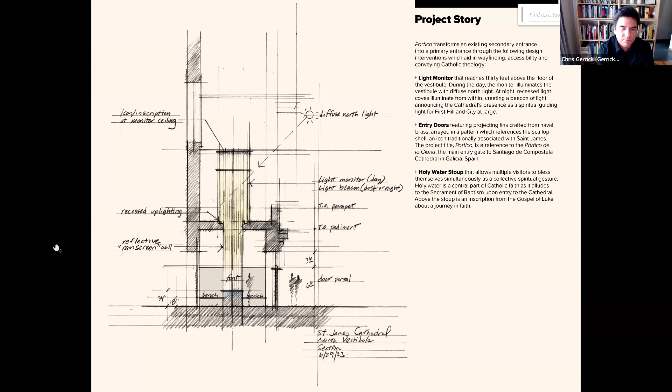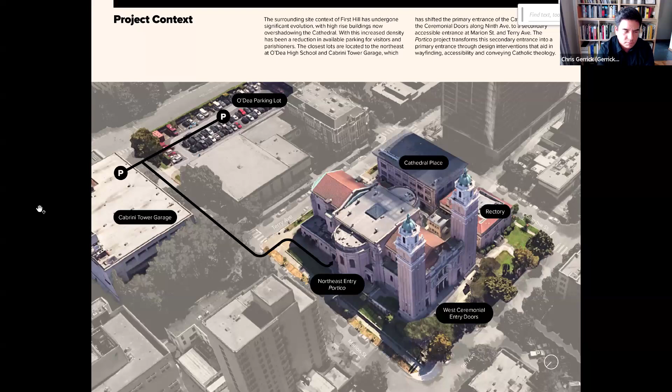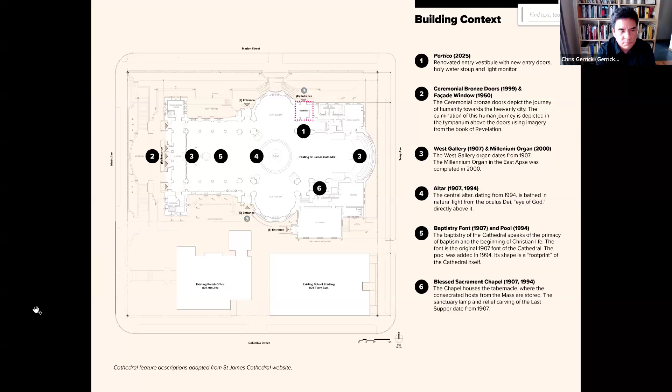A little bit of theological context. St. James, the patron saint of the cathedral. Many of you are familiar with the Camino de Santiago, which is the way of the saint leading towards the Cathedral of Santiago de Compostela, the burial site and shrine of St. James. A few aspects of St. James iconography-wise are the scallop shell. If anybody goes on a pilgrimage, oftentimes you'll see pilgrims carrying these scallop shells, and they're even used as wayfinding signs to help pilgrims find their way to the pilgrimage sites.

Additionally, as a pilgrim, the walking staff, in this case the gourd, is often associated with St. James as this path, this journey that you're taking, a spiritual journey.

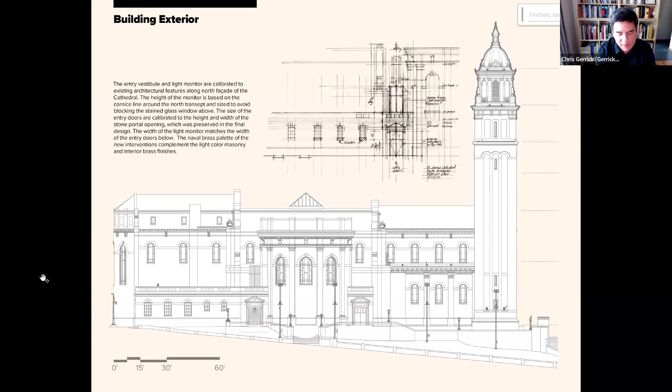Here's an elevation showing the scale of the light monitor in the entry doors. The light monitor is calibrated to the existing proportions, the string course of masonry around the building, around the transept. We took care to avoid blocking any existing stained glass windows. The cathedral is a landmark structure in Seattle, so we had to make presentation, but it was unanimously approved by the city in terms as a sensitive intervention in the existing context.

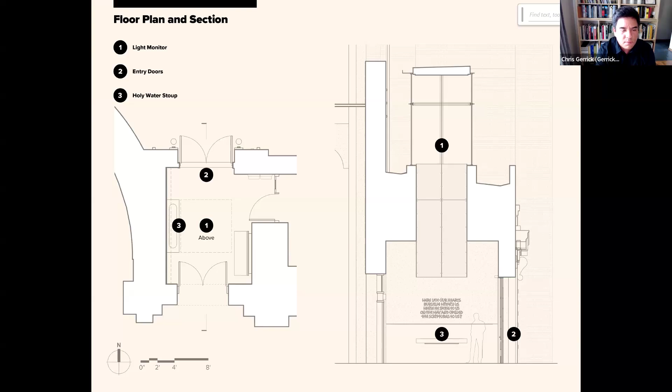At night, the light monitor glows. So during the day, you have this duality of the daylight coming in and then night acting as a light beacon. We took care also in terms of the detailing of the light monitor, so the structural columns were custom WT shapes, also in the form of a cross.

The iconography of the cross, very important to Catholic faith, shows up both in the elevation of the mullions on the light monitor, but then also the detail of the structure. That particular shape was also contributing to the lateral capacity of the light monitor. So we were able to avoid having solid walls and diagonal bracing, given how tall the structure was. All those themes come together in both the iconography, the architectural, and structural design.

Also, one of the key aspects of historic preservation guidelines is reversibility. The design of the light monitor is situated on top of a tube steel frame that is anchored into some glulam beams along the perimeter. So in the future, if it ever needed to be removed, you could theoretically remove the light monitor. But this process allowed us to prefabricate the light monitor.

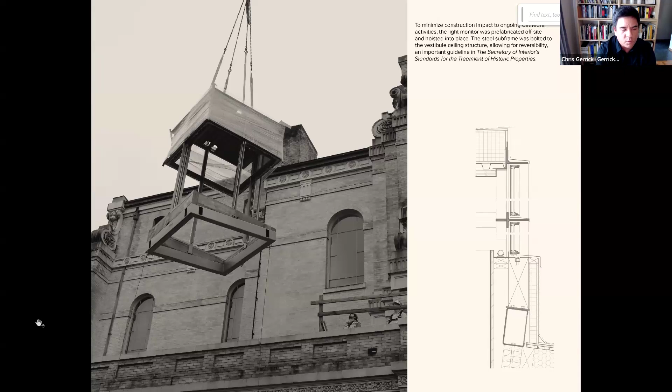The character of the light monitor changes over the course of the day. Even when it's not lit, you get a reflected light off the naval brass, which is used to pull in more of a warm light during the day. In the evening, all the concealed LEDs in the light cove above allow it to glow. So there's a sense of mystery and wonder where the light is coming from at all times.

The entry doors, the pattern of these brass fins on the entry doors allude to the scallop shell. In this view, you can see them radiating from above, and on the interior, they're radiating from below. To some people, it may evoke the scallop shells. To others, it may allude to rays of light from above. I know when Palm Sunday was celebrated there, some folks thought it looked like palm fronds. So there's a type of abstract symbolism to the way people bring their own reading into the design. The angled handlebars that handle the door handles allude to the walking staff crafted out of wood, also associated with St. James.

A view from the interior looking back towards the doors, the light monitor pulling in the light from above, the floating holy water stoup. The inscription on the wall is done by Robbie Schneider, a fantastic artist that we collaborated with from Scotland.

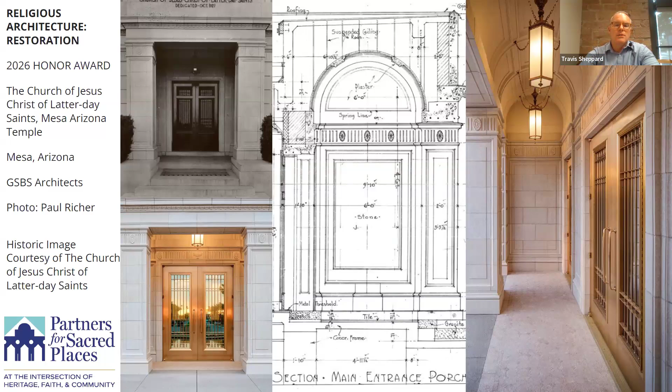A lot of the things that were lost in the remodels were proportion. Everything that we did, we had studied and meticulously documented the proportions of openings, materials, and details, and reconstructed the new with those proportions.

In the final design, we restored the pathways, gardens, reflecting pools, and the formal axes to strengthen the connection between the building and its surroundings. We restored a lot of the fruit trees on the site that can also be picked by anyone today.

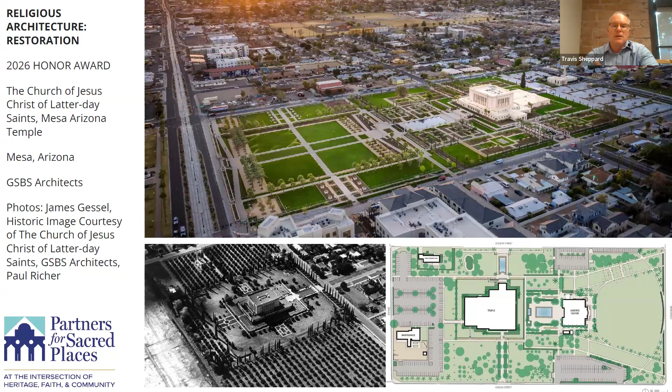A big part of the project, like I mentioned before, was sustainability. We created an underground cistern that captures local Salt River water for irrigation, which supported the restored landscape while promoting responsible water stewardship in a desert. The structural seismic upgrades increased the temple's resilience, and new mechanical, electrical, and water systems improved efficiency and reliability. On the interior of the temple, all of the lighting was replaced and upgraded throughout, on the interior and exterior, with highly efficient lighting sources.

Ultimately, the project demonstrates that preservation and innovation are not competing goals. By carefully combining historical research with modern engineering and sustainable design, this renovation honors the temple's past while ensuring it remains resilient, beautiful, and ready to serve for future generations. Then moving to the inside, that same level of care continued inside the building, which Stephanie will talk about.

Similar to the exterior, the interior restoration began by identifying the temple's original character-defining features and understanding what made those spaces unique. From there, we looked for opportunities to restore those features that had been lost, and importantly, to carry the same architectural language into the 1970s addition, which had originally been designed without many of those historic details. The goal was to create a cohesive experience throughout the temple while reorganizing the addition to improve circulation, functionality, and the experience for the patrons.

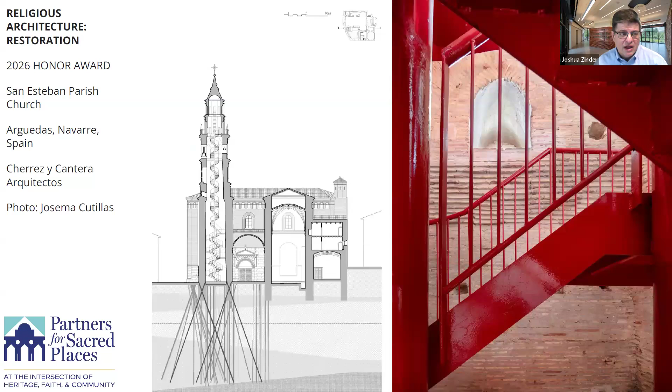The restoration process revealed to the architects how the root causes of failure were never properly addressed. Starting with underground studies, the architects provided diagnostics and a restoration strategy that defined long-term observation of the building over a 10-year period, including monitoring of movements, crack geometry, and their evolution, making it possible to identify the underlying causes of the damage. A targeted sequence of interventions addressed the foundations, walls, and rib vaults. The removal of unnecessary additions also restored the original natural light to the interior and recovered the south entrance and its square.

The jury observed: the entirety of this project was impressive, from the in-depth structural research that grounded the restoration plan to the integration of advanced engineering with traditional construction. Above all, what strikes us as the most beautiful is how restoring the original south portal also restored the relationship of the parish church to its plaza, spatially reestablishing an inspiring connection between ecclesiastical and civic forms of community.

Xavier Cherrez from Cherrez y Cantera Arquitectos is here to speak about the project.

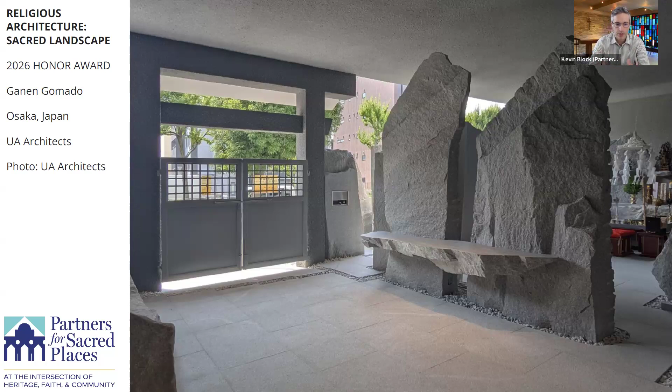Fire burns at the center as meditation rather than spectacle. Chanting, ritual instruments, and silence resonate against the stone surfaces, creating a soundscape that moves between intensity and calm.

The stone paving and gravel underfoot trace Osaka's ancient shoreline, recalling when sea and land once met here. This gesture connects visitors to deeper geological memory, reminding them that the present city exists within a far longer timeline.

Ganen Gomado is not an object to observe, but a place to enter, where nature, ritual, and urban life quietly coexist. The awards jury noted: in an overlooked and unprogrammed space beneath rows of mid-century pilotis, the applicants created a sacred Buddhist oasis in the midst of Osaka that nevertheless remains open to the noises, smells, and bustle of life swirling around it. The use of stone for the altar, light stand, dedication wall, and partitions, and the material references to fire and water, is particularly resonant.

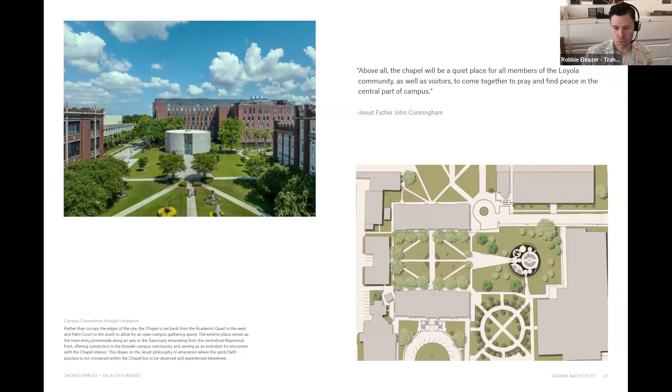So the simplicity of the partie, which you can see, invites people in both from the campus quad, the historic quad at the center left to right, but also from the palm court. And you can see how the interior geometries nest together and receive the campus into the plan. This is an acknowledgement that the quad was incomplete for years, and students began to move through this green space to get to classes as if a building wasn't there. So when we inserted the new chapel, we wanted to maintain that kind of spirit and not make the chapel a dominant force on the quad, but complete that part of the campus while still allowing for the free movement on all sides. Next slide.

The concept for the project arose by looking back at the namesake of the chapel, St. Ignatius, who created the Jesuit philosophical tradition. For those who don't know, Ignatius was injured in battle and recovered in Manresa in a cave, and during his recovery he received the divine inspiration for the spiritual exercises that would become the foundation of the Ignatian tradition.

We were conceiving of this project in the middle of the COVID-19 lockdown, with everyone working from home. We were really resonating with St. Ignatius in a cave, and thinking about the future emergence from the cave and what we might do.

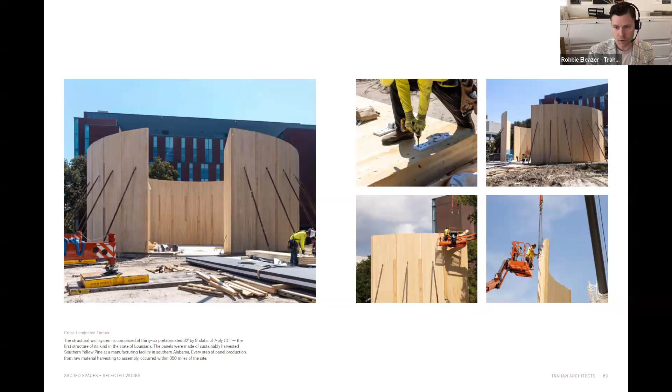32-foot tall, 8-foot wide planks of CLT tessellate to create the drum of the chapel, and this is what hosts the cladding. It allowed us to remove polycarbonate insulation and use the mass of the wood itself for insulation, resulting in a highly sustainable envelope. Next slide.

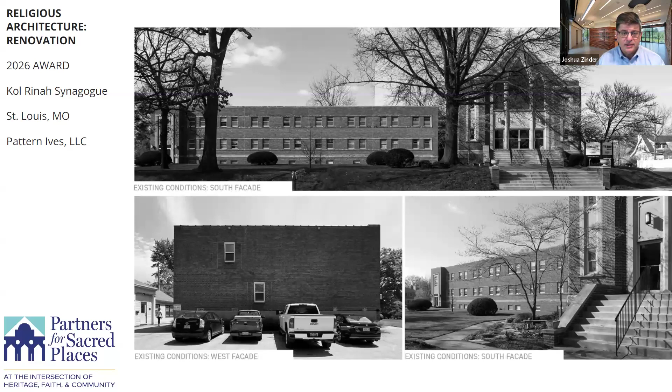Located on the edge of a growing business district, the design honors the rich history of both congregations while projecting a sense of optimism, carefully integrating a new sanctuary and entry sequence with the existing mid-century structures. The new sanctuary is intentionally quiet, grounded, and responsive to its urban context—austere and protective in form, yet warm and inviting. The new entry and lobby spaces are filled with natural light throughout the day and softly illuminated at night.

This luminous threshold supports the social and spiritual engagement central to Jewish faith, reinforcing the synagogue's role as both a sacred and communal space. The jury noted this is a project about the possibilities and promise of finding common ground, both through the merger of 2 Jewish congregations as well as the integration of a pre-existing church structure with the new addition. The easiest option might have been to demolish the former Hanley Road Baptist Church, but instead the synagogue celebrated the church's legacy by incorporating it into a new social hall. The site planning and exterior of the addition also addressed the congregation's safety concerns without compromising the quality of light in the sanctuary interior.

Anna Ives from Pattern Ives is here to speak about the project.

Hi, thank you everyone. I'm Anna Ives, managing partner of Pattern Ives. First, just a thank you to our client and our design team, the Faith Informed jury, Partners for Sacred Places, and the AIA for this incredible honor. It's really a privilege to sit here among such an inspiring group and to have the opportunity to share a project that really reflects so much of what we strive for as a practice dedicated to arts, education, and community.

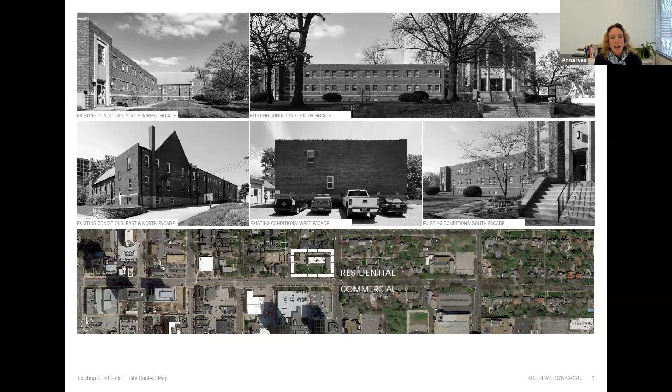One of the most remarkable parts of this project is how the property came to be acquired in the first place. Two religious institutions, the Baptist Church and one of the Jewish congregations, exchanged locations just a mile apart, each seeking a better fit for the needs of its congregation. What makes the story even more meaningful is that their relationship continued long after the agreement was signed. During construction, the church and synagogue communities worshiped and carried out their ministries side by side at one of the previous campuses. Next slide.

The work of building consensus among the large and deeply invested stakeholder community was one of the most important aspects of this project. Early on, we explored adapting the existing church sanctuary for worship. However, it was quickly clear that the congregation's vision would be better served by a new sanctuary addition. The new space could fully express Kol Rinah's identity while embracing abundant natural light and creating the intimate atmosphere so important for worship, prayer, and singing together as a community.

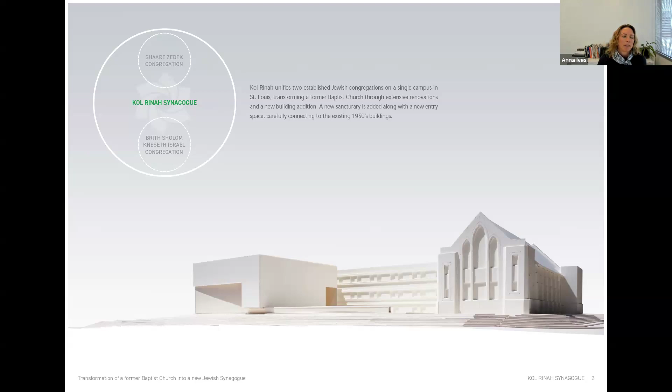The placement of the new addition reoriented arrival at the site, creating a clear and welcoming front door for the entire campus. To the west, the landscape was carefully shaped to provide a gently sloping garden path that offers universal access without the need for any handrails. The resultant space between the new addition and existing church sanctuary became a third gathering space, an outdoor courtyard that engages the activity of both the city and the synagogue.

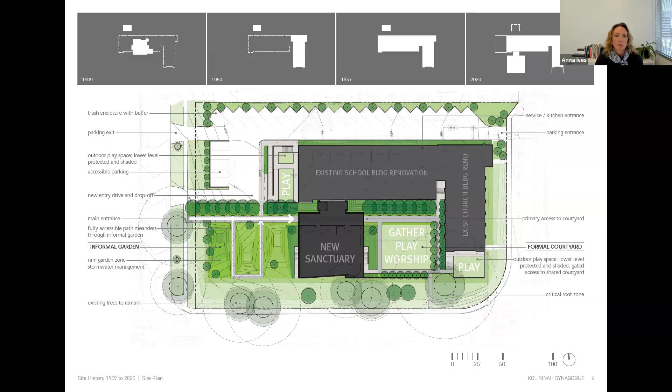There were many heritage items to relocate, including the first installation of three-dimensional stained glass, which you see here on the right, incorporated within a new blackened steel ark, as well as ten 18-foot tall paintings by the modernist painter Edward Boscia, and thousands of memorial plaques and other artwork carefully incorporated into the support spaces of the existing buildings. The new sanctuary was free of constraints other than to impart a sense of new identity for the congregation.

The new addition also helped solve one of the primary challenges of the structure: accessibility. By connecting the school building at an intermediate level and incorporating a new elevator, the lobby provides universal access to the ground plane.

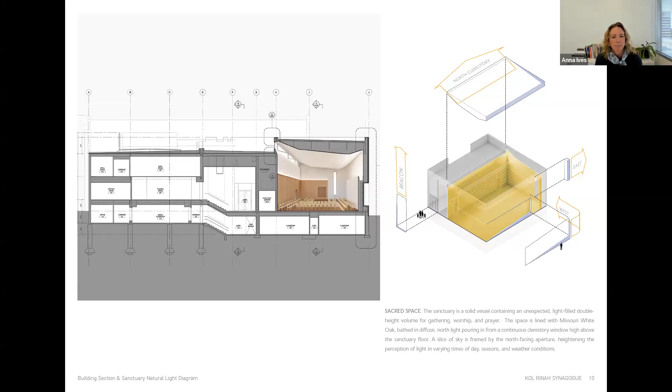The school building itself presented some unique challenges. Its original construction was relatively modest, with thin floor slabs and interior walls of 4-inch concrete block, which offered limited flexibility for alterations. So rather than forcing extensive changes, we embraced the idea of using the building's original purpose as classrooms and offices, preserving as much of the existing structure as possible.

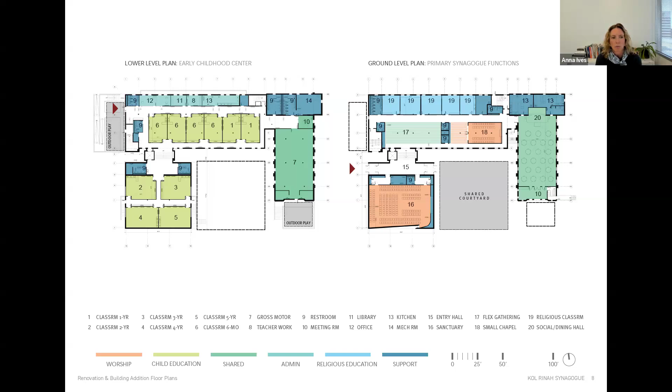The stone form of the addition is intentionally quiet, seeking beauty and expression through restraint, conveying both permanence and a sense of civic presence. Because St. Louis has such a rich masonry tradition, and because the region's dense gray limestone is so deeply tied to its architectural character, a limestone envelope felt like a natural choice, grounding the building in its place and context.

Once inside, the sanctuary is an unexpected double-height volume for fellowship, worship, and prayer. This sacred space is lined with white oak, bathed in diffuse light pouring in from a northern clerestory window high above the sanctuary floor. Ambient illumination from above is in dialogue with sharper, direct light entering through a thin vertical cleft in the west facade. This warmer light illuminates the east-facing ark wall from a concealed source, harnessing the symbolic and transcendent dimension of natural light while providing a dramatic backdrop for the bema at evening services.

What you can't gain from the photos is the quality of the acoustics, carefully incorporated into the mass of the stone and CMU exterior envelope, and the finished materials themselves, with thickened absorptive material hidden behind the oak lining, felted swaths of ceiling, and the gentle shaping of the room. The result is a tangible intimacy upon entering the monumental oak doors.

Throughout the project, the congregation remained committed to a phased approach, never losing sight of its highest aspirations for the campus. Even in the face of significant budget pressures, the limestone exterior remained a protected priority. It was seen not as a luxury, but as an essential expression of permanence and identity.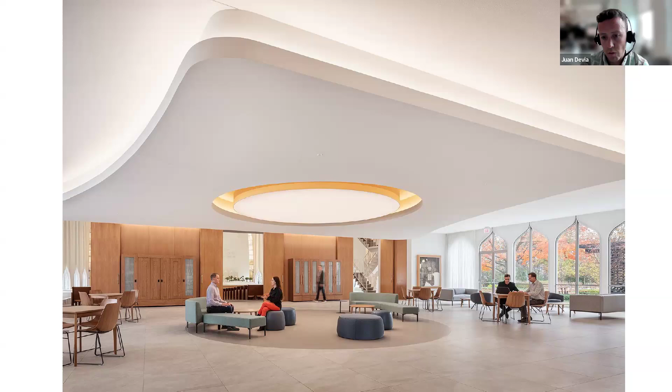You can see what we're talking about—some of these cabinets can move around the space, open up, offer an opportunity to divide the space, or be used to make a presentation. Some of them also have incorporated storage that serves as coat storage for patrons visiting the building.

We brought in some of the wood elements that were in the space and created these wood volumes—one of them is shown here. They conceal storage space behind them as well. We're trying to respond to all the needs that a space like this would require, while keeping it very subdued in comparison to the synagogue that is completely adjacent to it.

Here you can see how the incorporation of that gold element was brought in as an accent to the interior, keeping everything else in complementary colors, very low contrast, just keeping that yellow gold accent as the main element.

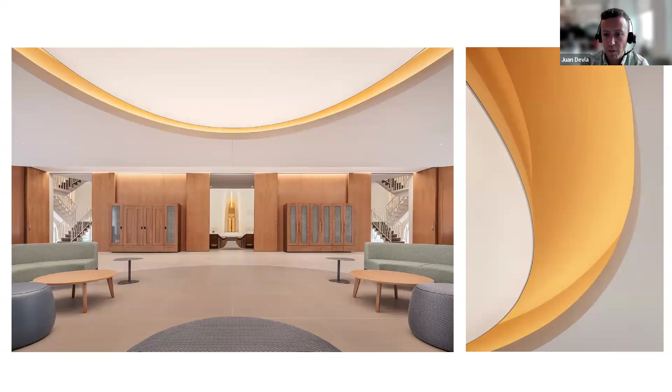Moving on, we can see Crown Hall, which is the second part of the project. This is the rentable space, a banquet hall, more of a larger formal event space—an addition done in the 80s by Hammond, Beeby, and Babka. This building also relates completely to the lake, with expansive views of it. It's postmodern and contains another sanctuary within it.

Here we can see how we used a different approach to a conventional ballroom, introducing that dramatic ceiling plane mentioned earlier, using circular and concave shapes to define the social hall and provide a fully flexible space. These series of cove lighting or drop ceilings in separate planes also conceal all mechanical systems so we avoid diffusers landing right on the bottom face of the lower ceiling—they're concealed within the cove.

There was also a strategy of starscape lighting to create a warmer lighting scheme, adding more visual interest to the space. We also incorporated a series of wall sconces around the entire space, along with updates to the materiality itself—acoustic drywall, acoustic materials on the walls, and expansive wood flooring throughout.

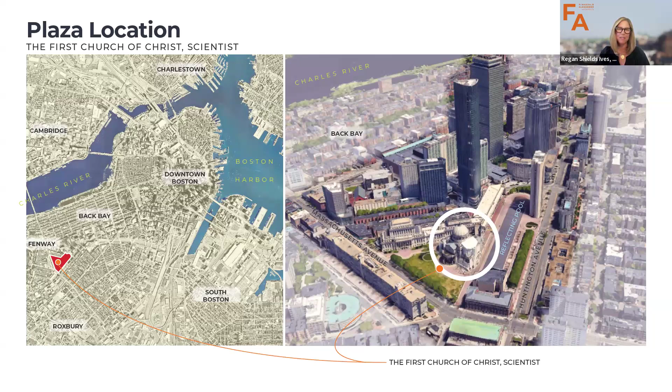On the next slide, you'll see what was described as these two structures that came together. The smaller building on the right is the TMCO, the original, that was built in 1894.

The extension was built in 1906. The fact that these two buildings were constructed just 12 years apart directly reflects the rapid growth of the Christian Science faith at that time.

Because this is such a complicated project, the next slide shows this restoration took place over 8 years, in 8 phases addressing systematic building envelope issues at the main dome, semi-domes, roofs, balustrades, facades, as well as interior restoration and improvements to the congregation experience.

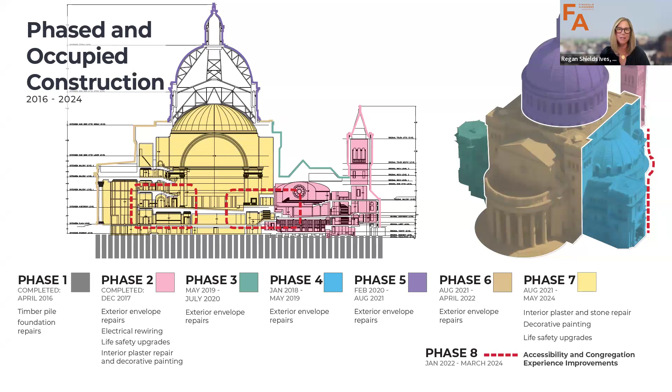We gave a graphic to spell out how this work was done. Then a higher level, simplified overview of the floor plans, so you get a sense of the difference in scale of the two separate structures. The pink represents the Mother Church original, the yellow is the extension.

To touch briefly on the interior scope of work that resulted from the compromised building envelope over many years, that also included modernization of the electrical life safety systems and accessibility upgrades.

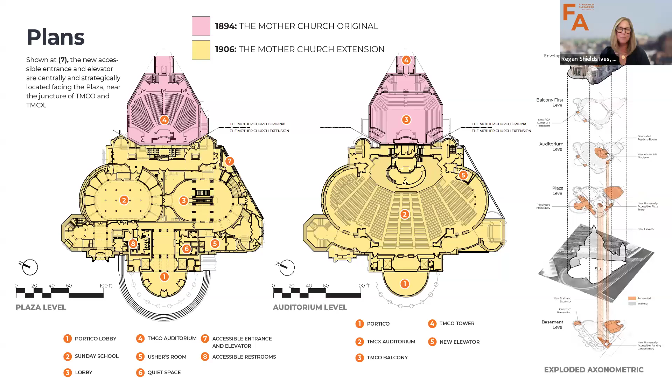In the next series of slides, we wanted to highlight some before, during, and after results of the project. We're starting with the exterior scope of work completed with our consulting partners, Simpson, Gumpertz, and Heger, who addressed the building envelope repairs, including replacement of the cupola at the top of the main dome, the semi-domes, the extensive stonework, and the facade.

The next slide shows how all that work comes together on the exterior. And Christopher is going to touch on some of the interior scope of work.

Beginning at the interior of the original edifice, the following slide shows the improvements and repairs to the building after the envelope. If you just go back one.

After the building was buttoned up and waterproof, we could really begin our efforts for the interior, where we turned to comprehensive upgrades of the mechanical and electrical systems, with particular attention to restoring interior decorative finishes.

The slide highlights transformation of the original edifice. Extensive trenching, patching, and plaster finish work was performed to integrate new electrical conduit and systems into the existing fabric, and to repair existing plaster substrate resulting from water damage.

In the upper left, you can see where we created custom templates to restore ornamental plaster relief, and paint conservation to repair finishes in place wherever possible and apply new ornamental paint throughout.

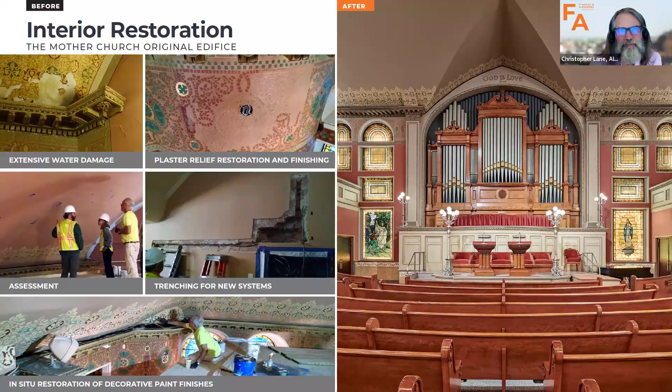Here we can see the conserved and repaired historic decorative plaster and painting throughout the space, including detailed plaster relief and reproduction of the cherished Mary Baker Eddy quotes found throughout the campus and building.

Here we can see the complete restoration of the TMCO, or the original edifice auditorium. This portion of the project focused on preserving the architectural integrity and visual character of this important gathering space. The finished auditorium demonstrates how restoration, preservation, and modernization can coexist without compromising the historic experience of the space.

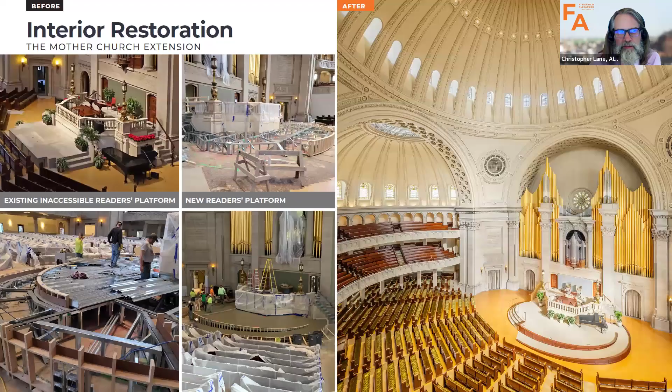Moving into the Mother Church extension, the second 1900s building, focusing on the new reader's platform. In the slide, we can see the original platform in the upper left, which presented functional challenges and accessibility limitations between the existing upper and lower platforms, along with congregation challenges and issues that no longer met the contemporary requirements of the church relative to the platform and the readers.

The project introduced a newly designed accessible reader's platform that connected the previously separated platforms, supporting the users while fitting seamlessly into the historic architecture.

The addition of the long sloped walkway at the front of the platform, in lieu of a typical ramp, addressed accessibility challenges while allowing for the omission of railings and guardrails, providing unobstructed sight lines and access to and from the platform. This is a strong example of improving inclusivity, accessibility, and usability while respecting the building's original historic character.

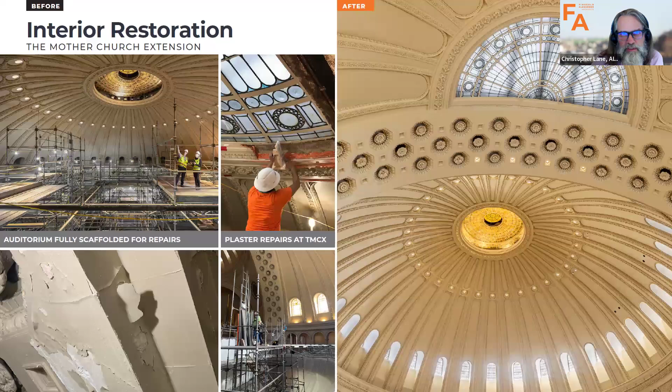Significant repair and conservation efforts were undertaken to stabilize much of the damaged plaster from the walls to ceilings, mostly because of water leakage into the building from failing roofs.

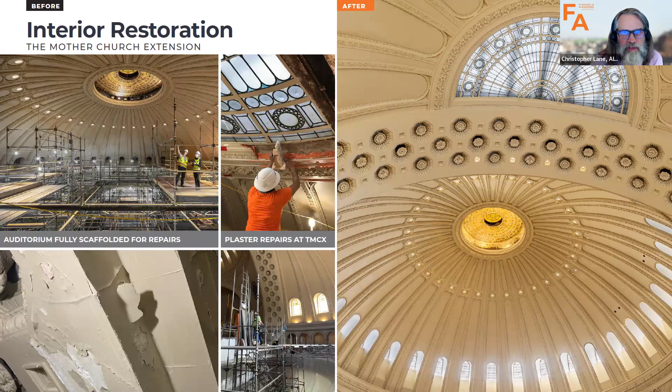The before image on the upper left shows Reagan and I atop the extensive scaffolding required to access the auditorium ceilings and decorative plasterwork. The restoration team worked carefully to replicate historic details and maintain visual continuity across the entire ceiling and walls throughout the repair process. The completed work renews the architectural finishes while preserving the craftsmanship that defines the interior as a whole.